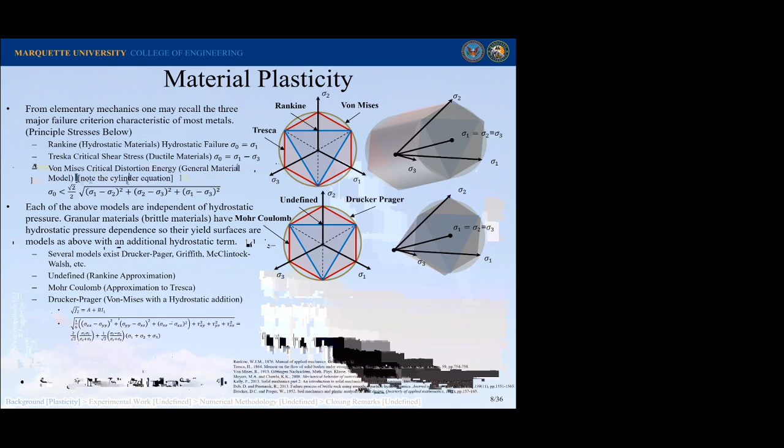So you've got your J2 stress, same as up here, and then you've just got sum of A plus BI1. That's a linear line, the line of this cone right here. Pretty awesome. And if you want to get even fancier, you can put on this plasticity cap right over here. You can see these are all uncapped. This plasticity cap bridges the gap between pressure shear and yield under hydrostatic pressure.

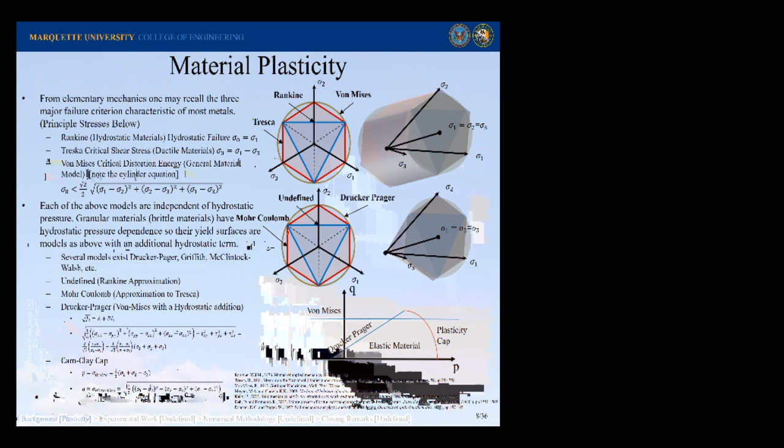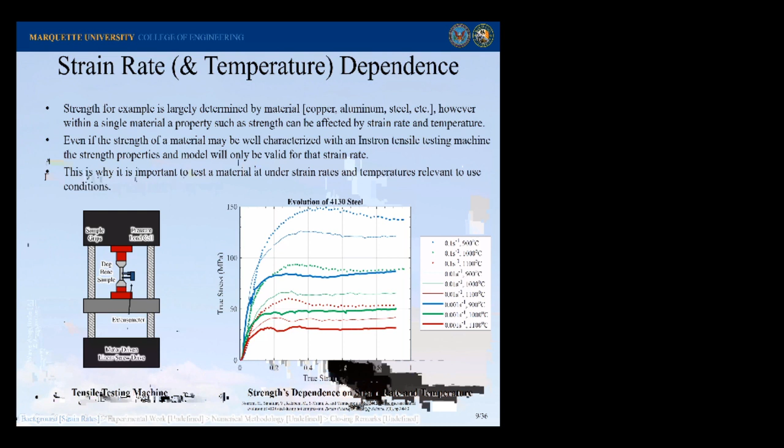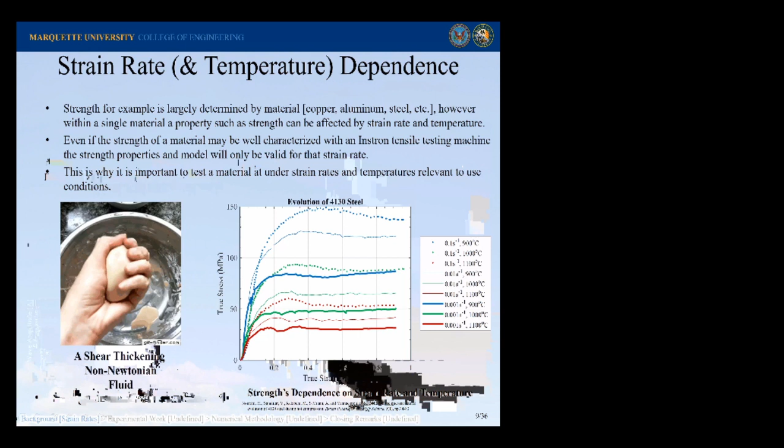So that's temperature's strength dependence. And then the other one to easily think about is non-Newtonian fluids. So this guy is doing the same kind of test in his hands right here. You can see as he increases the strain rate that he's applying to the material, it gets harder and it's not yielding. But if he lowers the strain rate, all of a sudden the material yields. You can think of this as analogous to some of the solids we'll be thinking about today.

How do you measure these strengths? Well, it all comes down to a really simple basic methodology.

So you have something that pulls on a piece of material at different rates, and if you want to get super fancy, instead of doing it at room temperature—which is okay because that's where most of our interactions take place—you add a heating element inside. These are all the things we use to measure strength, from creep, which is super slow, to tensile testing, all the way over to shock loading, and then particle scatter, where we can almost ignore the strength of materials.

But the place where I'm going to focus is right here. Before I go further, I wanted to draw your attention to this graph, just to show you—I really like this plot. It's got the quasi-static strength data, and then you go a little higher in strain rate, and you can see what a big difference that does to your strength.

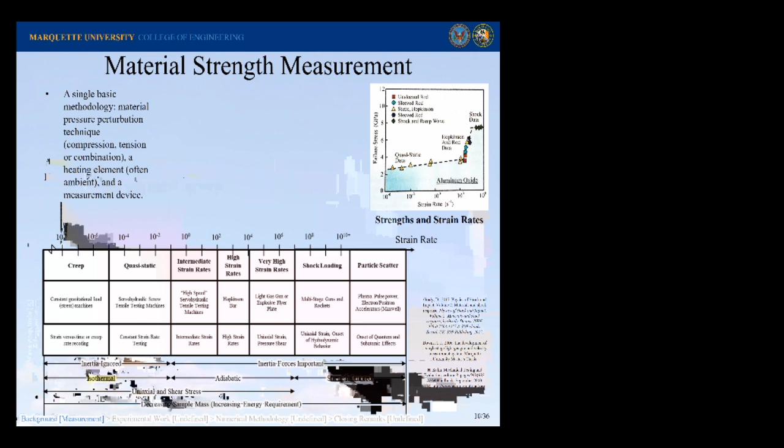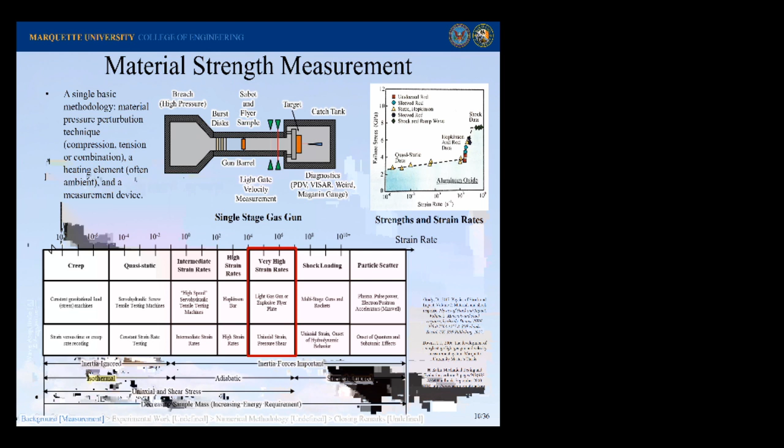So I want to focus on these very high strain rates. I know we have an Instron test machine here, and a lot of other people do, but we're unique in that we have this cool single-stage dual diaphragm gas gun, which has a large bore—helpful for myself later—and a single channel through it, which is also helpful. This will allow us to start probing some of these strength-strain rate relationships. Later on, if we exhaust all we can do with this gas gun, all you need to do is add a heating element, and then we can apply for a new grant. Simple as that.

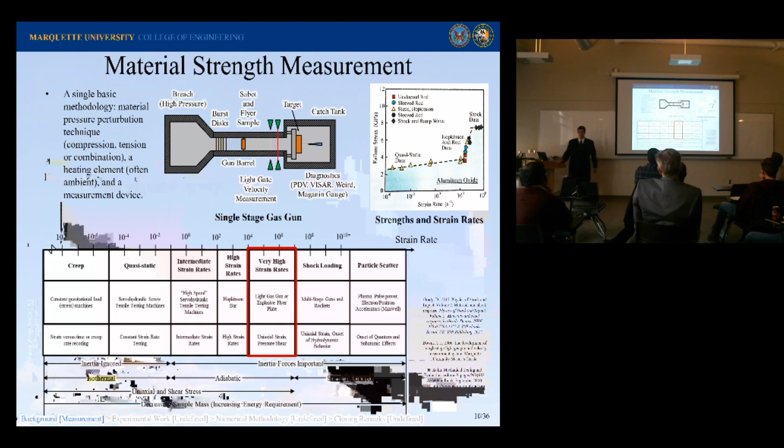Strengthening—let's look at a couple of the models. We went over Drucker-Prager, so I wanted to go back to this elastically perfectly plastic von Mises yield criterion. It's not strain-based, so if we were to plot it, you can see it's just one value. Not very exciting, is it?

But if I use this Drucker-Prager model inside, uniaxial tension and compression—I'm just doing the derivation quickly here—you can see that if you take these terms and set the strength in compression and the strength in tension the same, you end up back with the elastically perfectly plastic model. So each of these things will go backwards. All we did here is add a linear element to this. Then we'll make it a little more complex.

Most of the models today are things like Johnson-Cook, which have higher order terms and include data for different strain rates. You can see the same element right here in the Drucker-Prager, this linear element, right down here. But the only thing different now is instead of that one strain rate Drucker-Prager thing, we've got a couple of scaling terms over here—one scaling term for temperature and one for strain rate, just as I was talking about before. And you can see right here we have a much cooler loading path.

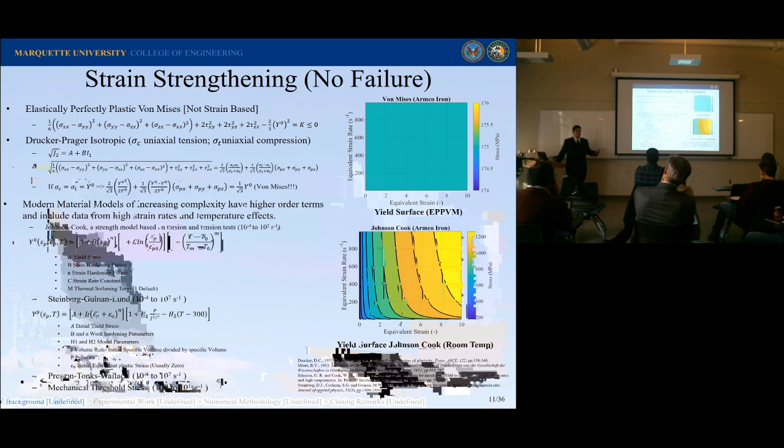And this is yield—it's not ultimate breaking, not snapping, not fracturing, just yielding. So you get plastic stress, plastic flow stress, and it just flows, hugging that yield surface. If you want to get a little more complicated, you just add on extra terms, and start fitting these scaling parameters a little better, and that's all those other strength models are.

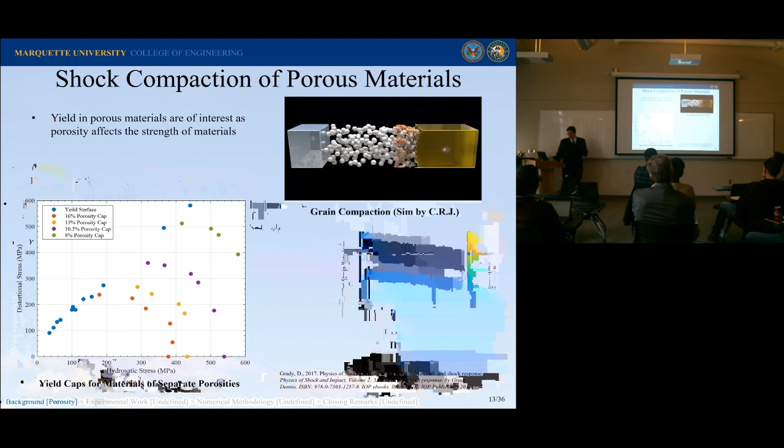Really cool. When you look at different porosity inside materials, you can see that porosity also affects strength. So this is a low porosity, and this is a high porosity; as we decrease in porosity, we increase in strength.

You can think of this as having two different strengths associated with it. Imagine a spring as a porous element, and instead of compaction, we're doing tension. The spring has its elastic regime, right? You pull on it, it might have some plasticity, and you'll be getting the properties of the spring.

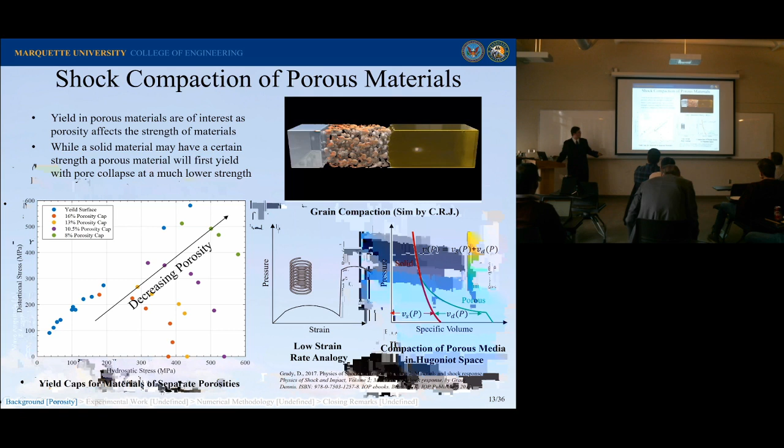But eventually, if you pull on it enough, you'll no longer have a spring, you'll have a solid metal rod. So you'll go from the material properties of a spring, a mesoscale property, to a solid property, which is just the property of the steel you're pulling on. You have to keep that in mind when working with these materials. So you have this porous curve, and eventually it'll fall onto this solid curve.

Quick overview of pressure shear. Why do we want to do it? Typical uniaxial experiments load us in one principal stress area, but pressure shear takes us off that axis and gives us a better yield surface, if you remember the Drucker-Prager. In order to do these, we use the oblique impact experiment. It has a number of uses: dynamic friction, viscosity of materials, but we're going to use it for pressure shear experiments.

So of interest in this study is the distortional strength model of sandstone. You can see this data that already exists, at low strain rate. So we would anticipate a larger curve right here when we go at higher strain rate.

But if we look at porosity, you can definitely see it's having an effect on strength. I've normalized it here, but if I take off the non-dimensionalization, you can see the sandstone has that same curve as before, getting much stronger for lower porosity.

The specific test I want to do is pressure shear: we're going to take a flyer and impact another material. So here's our system: we've got a sabot and a piece of metal on the front, and then we're going to impact the material at an angle.

Based on the wave structure, we're going to first load it in pressure, then in shear, and then get our yield surface. It's really difficult to do it the other way around—if we tried to load it in shear first, because the shear wave is always slower than the longitudinal wave. So you first have to load it longitudinally, then in shear. That's how we get onto our yield surface and populate our curve.

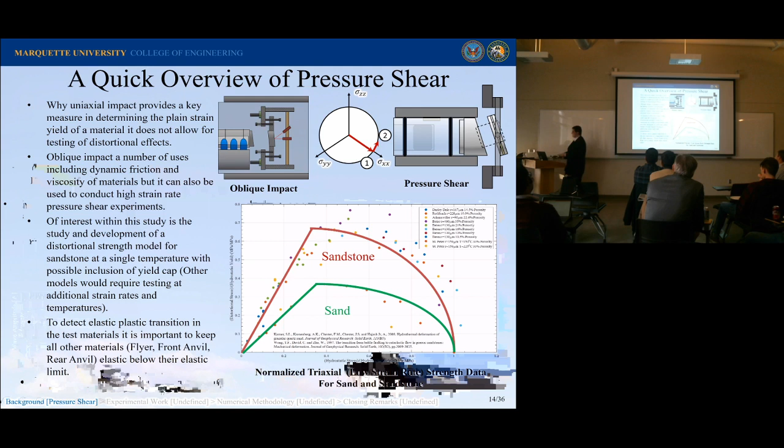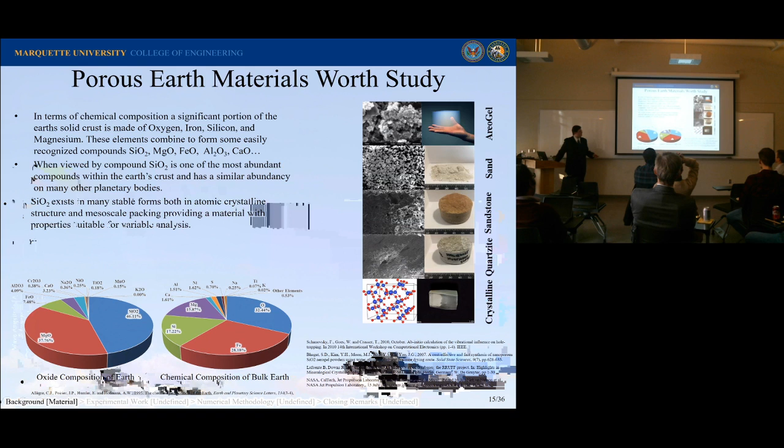The other reason it's worth studying is that it's found in many different stable forms, all the way from this really low density aerogel to this really high density crystalline quartz. If you look at shock behaviors and pressure shear materials, there have been some studies done in the past. I've seen pressure shear results for crystalline materials, as well as recently here at Marquette University for sand at pressure shear and high strain rate.

So I would like to put my stamp right here. If you notice, the casual observer will note that there are two extra slots currently available for enterprising undergraduate and graduate students.

Granular materials and porosities are of great interest, especially to people who work with porous materials, whether those be brake pads or something like that. Propagation of force through these geometries, these force chains, that's pretty interesting behavior, and it's really important for understanding structures and foundations. The scientific community uses this to do simulations and understand the materials around us.

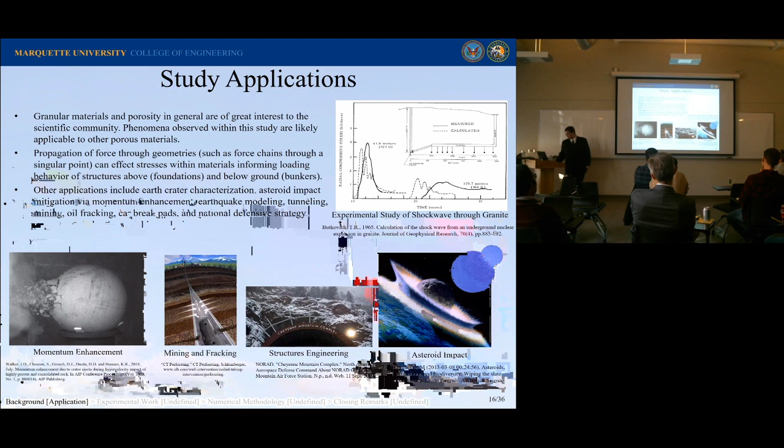Other applications include momentum enhancement. We have mining and fracking, made out of SiO2, that's how you pull out the oils. There's structures engineering, and finally asteroid impact. But as I said, you can also have stuff like brake pads. It's applicable to a wide range of applications.

Next, I'm going to go on to my experimental work. How am I going to do this? I'm going to do three different things: grain property characterization to characterize my grains, a couple of uniaxial shots to figure out the properties of uniaxial sandstone, and then I'm going to try to do strength studies with pressure shear.

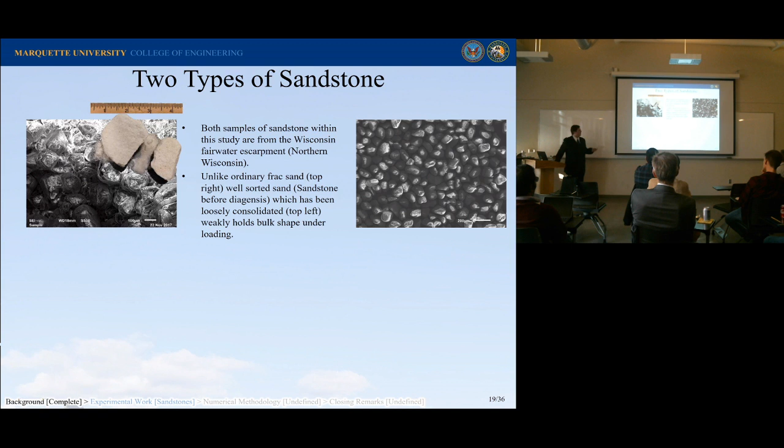I initially looked at two different types of sandstone. I had this loosely consolidated sandstone, which was really hard to work with. It hadn't really undergone diagenesis and it falls straight apart. Then I have this well-consolidated stuff, which is much closer together, so I can machine it, which is awesome.

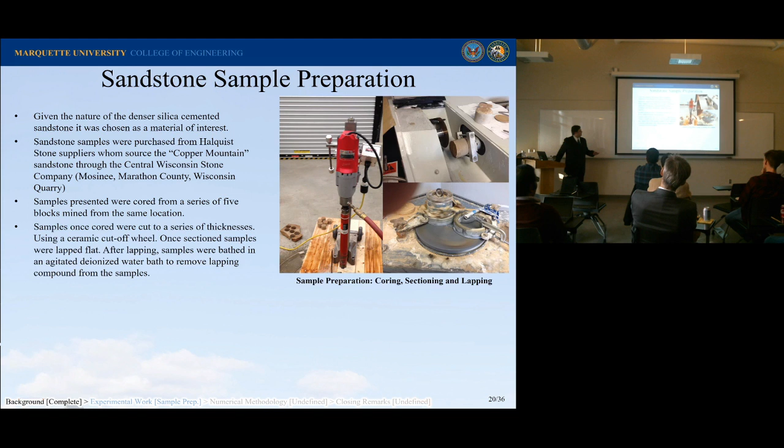To prepare it, I drilled it out, then I lapped and cut it, and then finally I could machine properties into the sandstone. This average grain size allowed me to cut samples as thin as 0.5 millimeters, which was interesting because my largest grain size was 500 micrometers. I think there might be a correlation there.

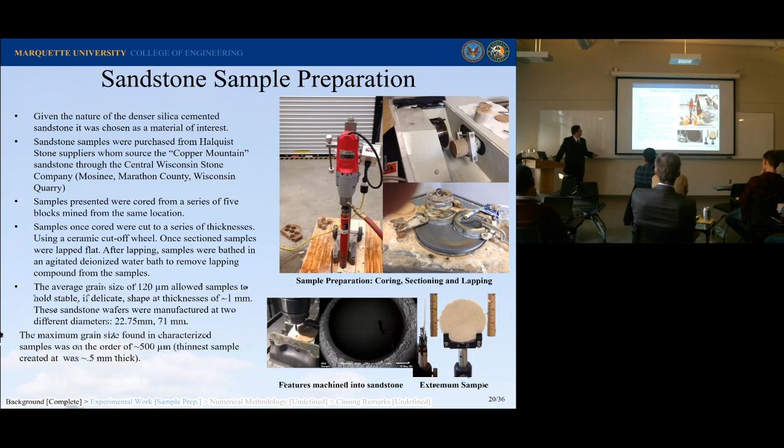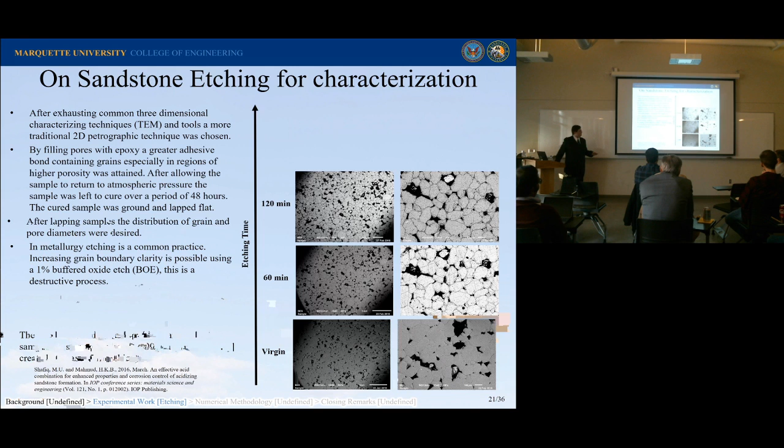In order to characterize the actual grain properties, I looked at some 3-dimensional characterization techniques, but eventually I went to 2-dimensional characterization. I had this virgin material after I cut and lapped it, and then I was able to use a 1% buffered oxide solution etchant, gradually whittling away my boundary areas. Eventually it becomes really porous, so I'd recommend etching somewhere between 60 to 120 minutes to get your characteristic grain sizes.

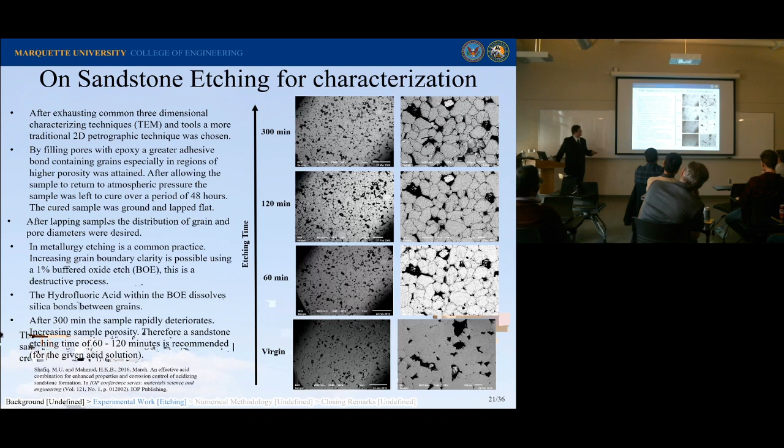Once I have my etched sandstone, I put it through a linear image registration with MATLAB, combined all my pictures together, did some erosion, boundary identification, merged the data together, did an edge discard, and then found my grain size distribution. I could use ImageJ, and then I got some sample statistics out for all of my grains.

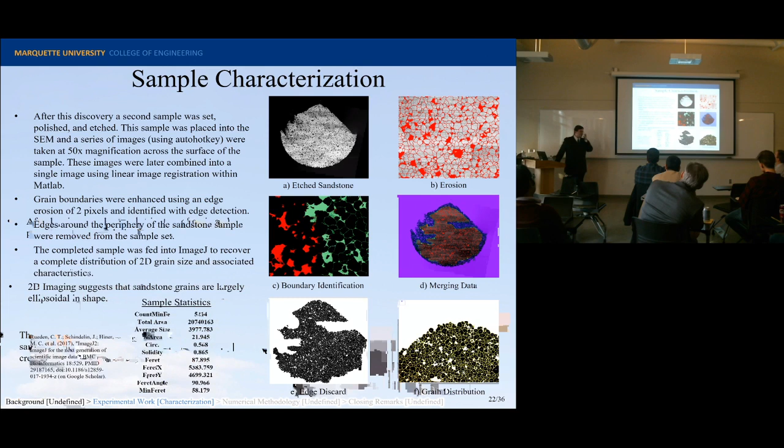I had a total count of 5,154 grains after I did the discard. That was to make sure that I didn't have any boundary grains or ones that were too small. In order to get the 3D grain distribution, I used the Saltykov method, thanks to Dr. Furnell, which takes 2D spheres and makes them into 3D spheres.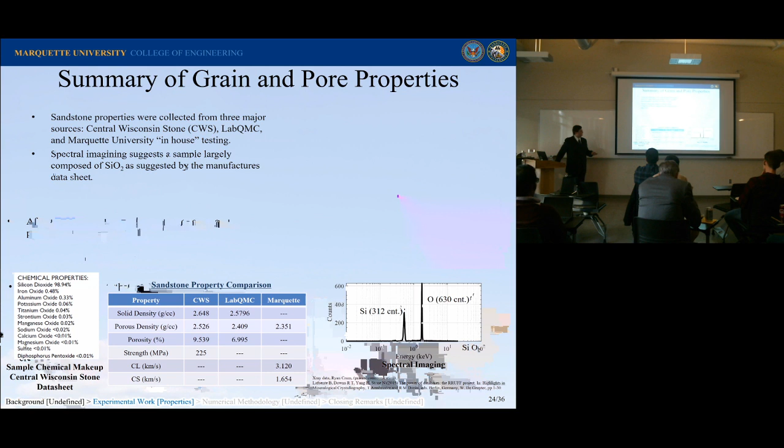For spectral imaging, I was able to put this into our spectral imager. As you can see, it's mostly SiO2, which is a good sign. Then I put it into an X-ray data comparator, and I was able to see that the grains we mostly had were probably alpha quartz. You can see we've got a lot of peaks that match up really well. With these, I can build models later on.

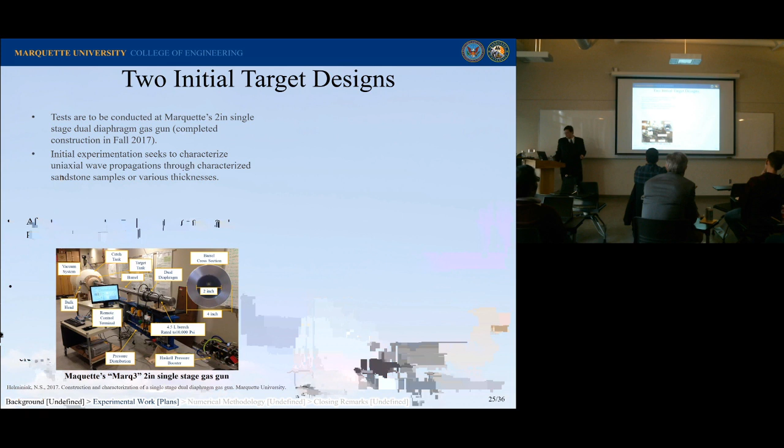So I have two initial target designs, and I'm going to shoot them in our Marq3 single-stage gas gun. We have this single uniaxial sandstone target, where we just hit the face, and then the other target is a 3-sample design, so we can monitor the effect that grain sample thickness has, and figure out the minimum thickness we can use for a heterogeneous sample.

Dan: Can you just go back and slow down on that slide? So you've got this piston, right? Speaker: Yeah, it's pretty much a piston. Dan: Right, okay. And where's the sandstone? There's a thin layer, where is the sandstone? Speaker: So inside the large uniaxial target, it's just sitting at the end of the barrel right here, and then we impact it. Dan: Well, how thin or thick is the sandstone? Speaker: I've gone from 0.5 micrometers all the way up to, I think it's 6 micrometers in thickness.

That's really thin, millimeters. 0.5 millimeters to 6 millimeters, sorry. Oh, like a quarter inch or so.

So basically you're ramming this thing in, right? Yeah, you're hitting it. And then you're measuring. What are you measuring in the sandstone?

I'm measuring the velocities that are coming out the back. So as the waves travel through the material, you get two different things: the pressure that's coming out, a particle velocity, and then you also get a time that it takes for the wave to travel through the medium.

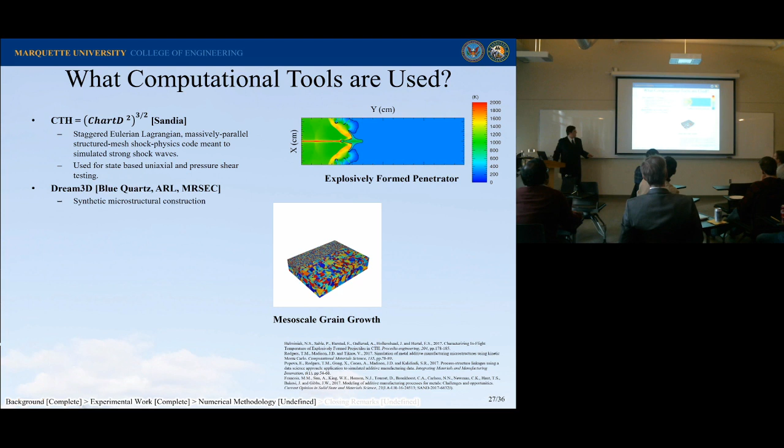Dream 3D is what I use to make my mesostructure; it comes out of the ARL synthetic microstructure reconstruction. ImageJ is what I use to post-process my different grains. And MATLAB is what I use for my data processing.

Finally, to do visualization, I use this program called ParaView out of Sandia National Laboratories. And to do a little bit more of my elastic wave studies, I've played around with Peridigm. I may put it as an addendum inside of my doctoral dissertation, rather than a full part.

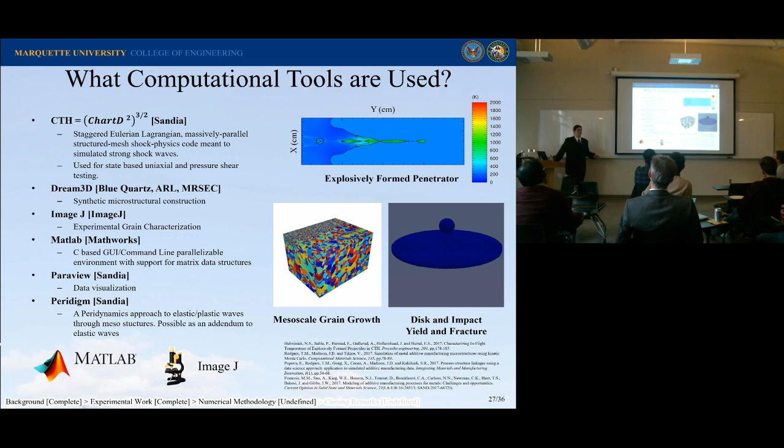I started off with this P-alpha simulation. A P-alpha model just assumes that some sort of heterogeneous material has porosity properties. So it's not great, but it's a good first guess.

I had this 2D rectangular domain. I put in some equations of state; you can see I used the alpha quartz model based on what I have, iron and PMMA, because those are the materials I'm using to hold it. And then I have the strength models.

For the sandstone, I used an EPPVM model that I got off of, I think it was either Gregson or Ahrens and Johnson. I went back from a Hugoniot elastic limit to find the yield strength, and that's valid because they did the test at high strain rate.

So here's the initial conditions: we had an initial velocity of 100 meters a second. You can see this wave come through the first material into this material, go through the sandstone, and then it hits the back wall, and that's where we collect our data.

Based on how the data goes through this sample, that's how we collect it. You can see the material go through, and the impact goes through the sample, and you can see the wave change around here. That's the elastic portion, this is the plastic portion. Then it hits the back surface, and that's what we record off of the back.

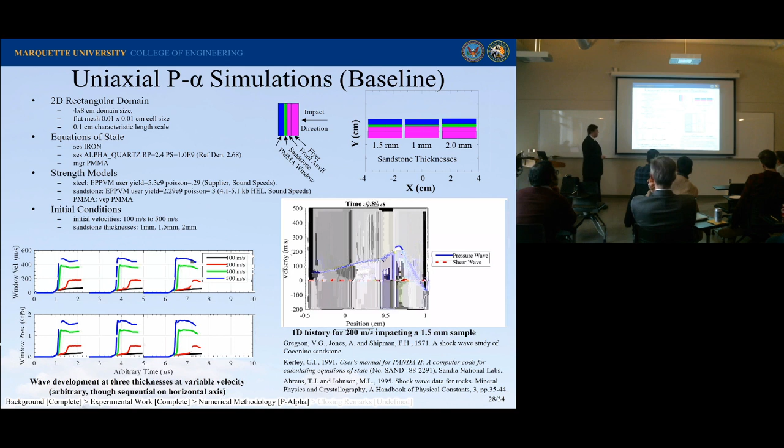Here I've done a number of different simulations. If we look at this one right here at 100 meters a second, you can see it's got one wave and it's really slow velocity. But if we look at this higher velocity one, at 200 meters a second, we can see that we've gone above the elastic regime because we've got two waves, a small one and then a bigger one. And then you can see that slowly starting to taper off in this 400 meters a second one. And by 500 meters a second, we've overdriven our sample. So you can see that from before on our different slides.

Then I started to do some uniaxial thickness simulations that were a little bit better. I built this 3D model in Dream 3D based off of the grain size characteristics from before. I sampled those, put in some equations of state, given some strength models based on quartz this time, since I'm giving the strength model to the grains rather than the whole body as a whole. Then I give it some initial conditions, and you can see right here I have this impactor, and you now get compression of the grains as you go through and decreasing porosity, which is pretty awesome.

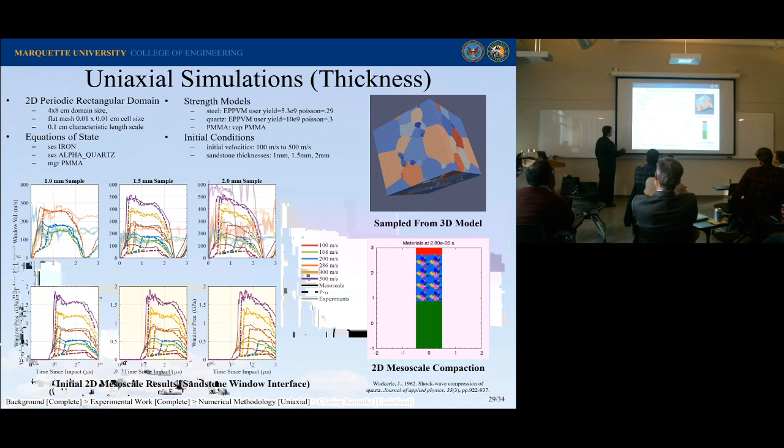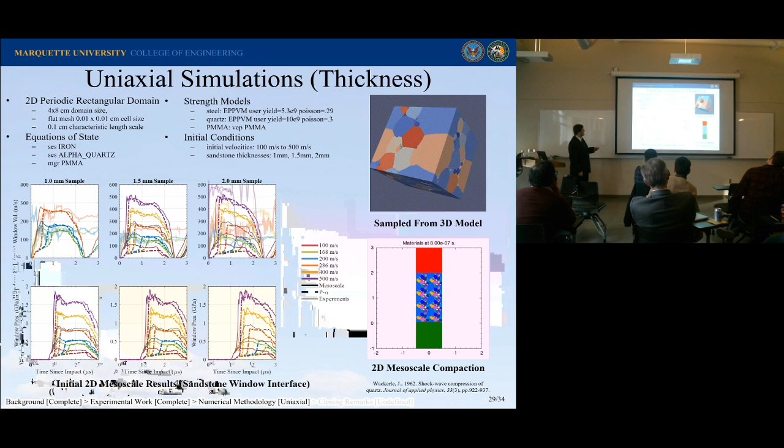Let's go and compare it. This is a pretty busy plot, but I draw your attention to this one over here. This stuff in dotted lines, these are the P alpha models - that's the approximation for a homogeneous, heterogeneous material. You can see right here with my new stuff, this solid line right here - these are my simulations with mesoscale features. And then these light lines right here are some experiments that I've run. I still have some more to go though, but you can see that my mesoscale stuff is fitting a little bit better than my P alpha model, which is pretty cool.

Then I want to do some pressure shear simulations. Once I finish with my uniaxial sims, I want to do pressure shear to get strength. So before I was getting equation of state, now I'm getting strengths. In order to do this, I have a material in the front and a material in the back. First I load it under pressure, and you can see that I've got two different pressures on the front and back surface, but eventually they converge together. After they've converged together, then I put in a shear wave through those materials.

In order to do this, it's really important that you have anvils that are about the same impedance as your other material. That just means that the information traveling in one is close to the information speed rate traveling in the other, and that decreases the number of rings it takes to get a steady state longitudinal pressure. So you want to be up here before you put in the shear, otherwise you won't be at full hydrostatic compression.

So when we go to our Drucker-Prager model that looks like this, we want to go hydrostatic, then distortional. That's how we're doing it right there. You can see on this back surface we have the hydrostatic, we come to a steady state, and then we can measure this shear coming off of the back.

Theoretically we could hit the sample with an identical impedance and then we would get immediate pressure state, but we need something that's a higher strength than the material we want to study. Because if our anvils yield, then we're measuring the yield of the anvils and the material, and it's really hard to parse them apart. So you want anvils that are higher strength than the samples we're trying to measure.

So it gives us a whole bunch of constraints for our experiments. You can see right here I'm trying to do different timings to make sure that my longitudinal waves fully bring up my sample in 3 waves - 1, 2, 3 - which is about 95, 96%, before this shear wave arrives right here. Then this is my timing window where I'm allowed to measure each of these different states. So between here and here I measure the pressure state of 1. Anyway, just a bunch of optimization there.

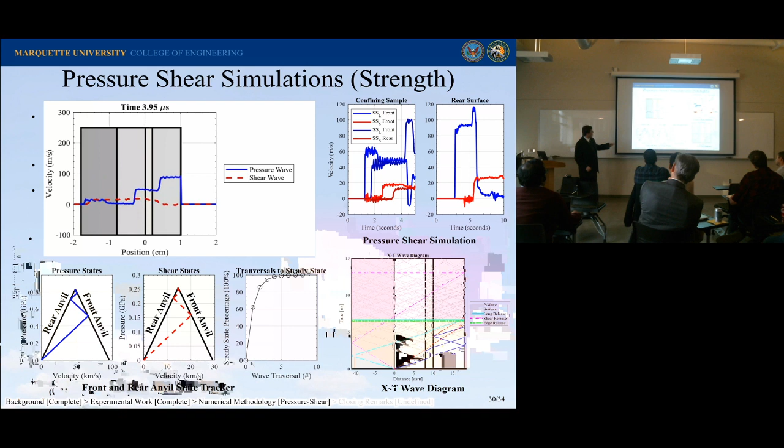So here I have a simulation. You can see the longitudinal wave, this blue wave, coming into the sample, and following right behind it is the shear wave. The shear wave goes through the sample next, and then you get the pressure wave coming off the front, and you get the data. Then the shear wave comes off the back, and you get the shear data.

And so that's how you've measured the strength of material under pressure and shear. You do that at a bunch of velocities, you get a bunch of different hydrostatic pressures, and then you can get different distortional pressures.

Finally, I have some closing remarks, hypotheses, and conclusions. So I hypothesize through this characterization that if I increase the amount of information I put into my numerical models, the more it accurately models the actual stuff I have, the closer I will get to what I really have. I want my numerics to match up with my sims, and the more information I put in, the better that comparison will be. I think that's a pretty good hypothesis.

Uniaxial tests: I want the heterogeneity of the sandstone samples, especially at low thicknesses. This is important because I'm trying to measure the strength of sandstone, not the strength of quartz or the strength of the pores. So I need to make sure I have a maximum thickness of sandstone possible while still being able to do my pressure shear experiments, because if they go too thick, I won't be able to load it up in pressure, then in shear.

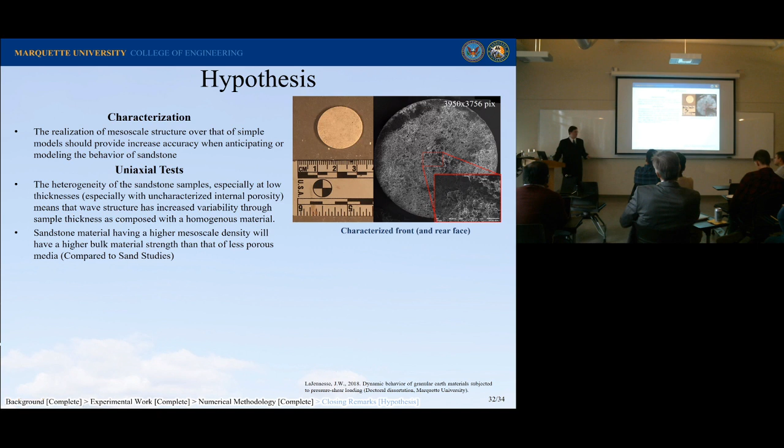And then finally, a sandstone material having higher mesoscale density will have a higher bulk material strength, than a less porous media. We'll see if that's the case as well. If I can do enough pre-characterization, maybe I can see there's a porosity-strength relationship. It'll be a lot easier to do than something like sand, where it's harder to control your porosity. At least I can pre-characterize to some extent.

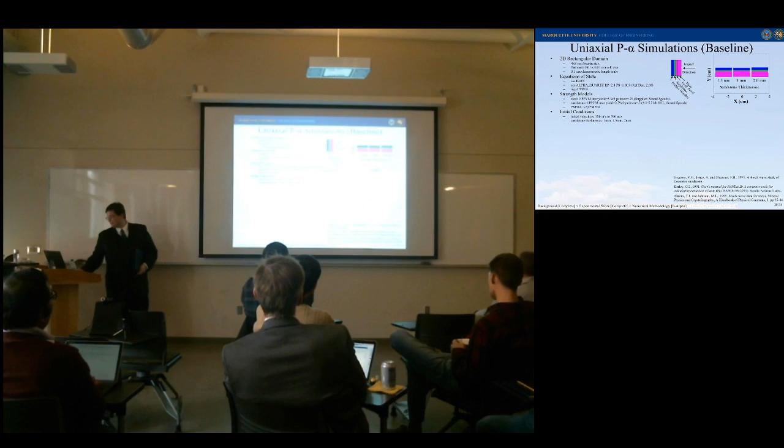You bring up another good point though. Since I'm doing this post-mortem stuff, I could take some of my post-mortem samples, grind them up really fine, throw them inside the X-ray, and see if I get different phases afterwards. That would be pretty cool to see if I got changes in crystalline type. If I went from something like alpha quartz to beta quartz, or maybe even some stishovite, that would be pretty awesome.

David asks a question from Arnie: Nathaniel, how did you pick your PS in your P alpha model? It's set to 1E9. Just curious if you have a sense of what range of values might be appropriate.

Okay, so if I go forward to show what he's talking about. I'm just starting my initial uniaxial and P alpha simulations, and I'm kind of hoping to do a different range of different PS values, just to see what effect it has. I just started off with this one. It's still just in the beginning phases, and I probably need a little bit more fine tuning on my P alpha model. So I will definitely work on doing some more different numerical models to try and fit my data better. This was just a first pass proposal. Fair enough, trick question.

Thanks, Arnie. Dr. Ernest asks: what happens to temperature during shock loading? Typically, the temperature will go up, and then when it releases, the temperature will be a little bit higher than before the wave went over it.

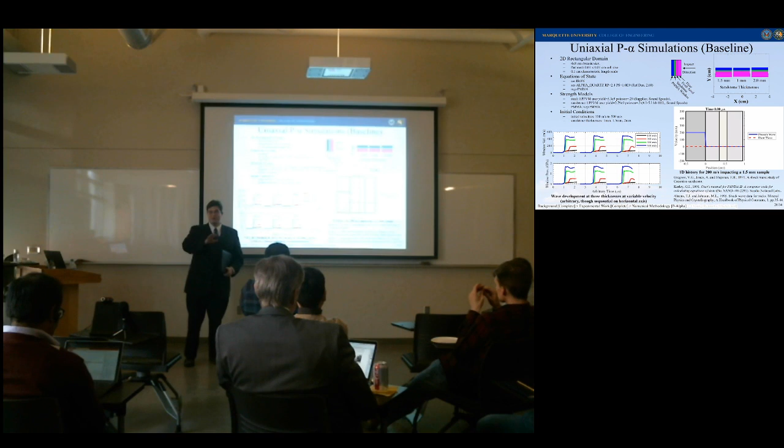So let's say you have something like copper, and you shock it up to 1 megabar. That would go up to, I'm going to guess, something like 700 Kelvin. I'm spitballing here, but this is all orders of magnitude. And then when it falls back down, if you were something at like 300 Kelvin, it'll go up to something like 320 Kelvin. These are all very broad estimate numbers, but there's a really cool equation in Jerry Forbes' book on shock waves that'll take you up in temperature and then back down when it's released adiabatically. But because of that chaos, a little bit of that temperature is left over inside of the material, it doesn't go back down to its original temperature after the shock's passed.

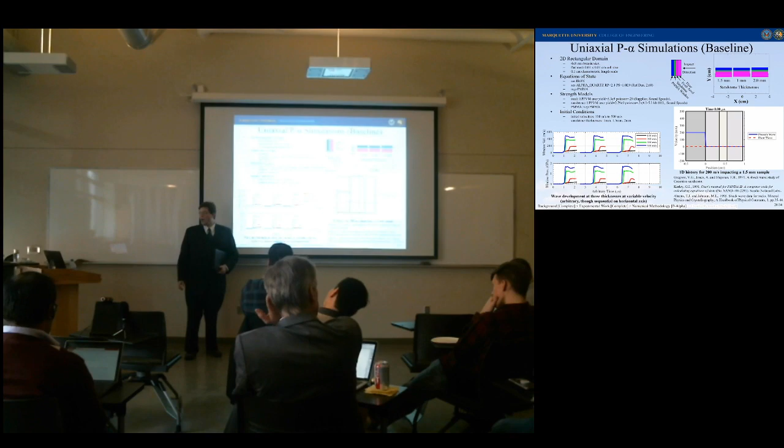But if it happens so fast, you don't expect any transformations due to temperature? I do expect some transformations due to temperature.

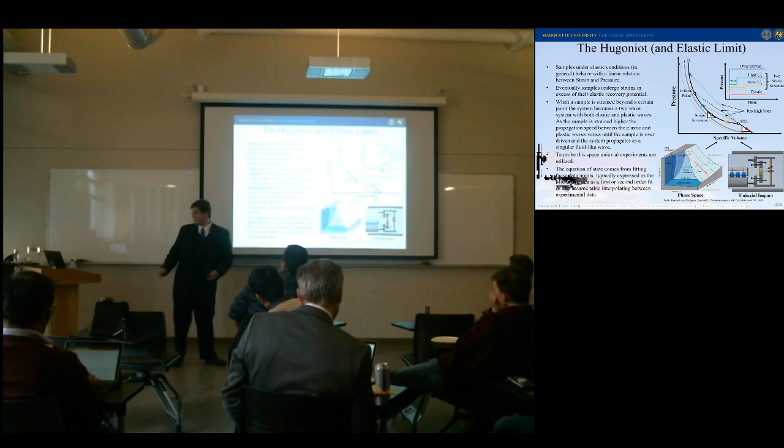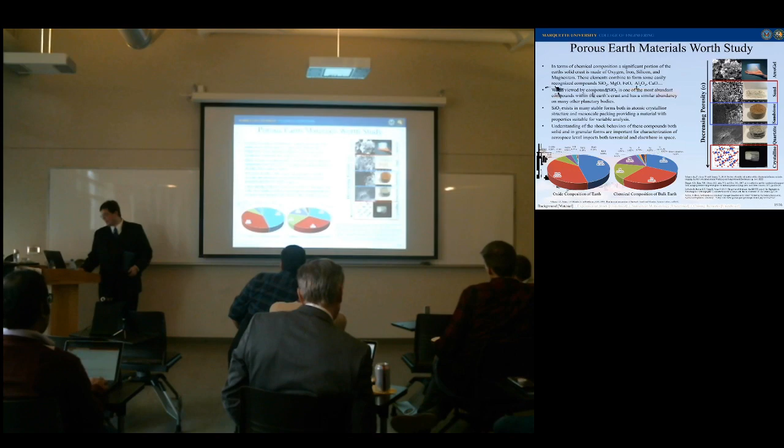So at this point, if I was to start off, I've only got 2, maybe 3 set points. The other thing that's a problem is I've got 3 different types of materials. Maybe at the end of this study, I'll have 3 different materials, I'll have the sandstone, I'll have sand, and I'll have maybe some crystalline data. The problem is when I go from sand to sandstone, my grains aren't necessarily the same. So if I was to make a model for sand to sandstone to crystalline material, I would call it natural, like natural porosity.

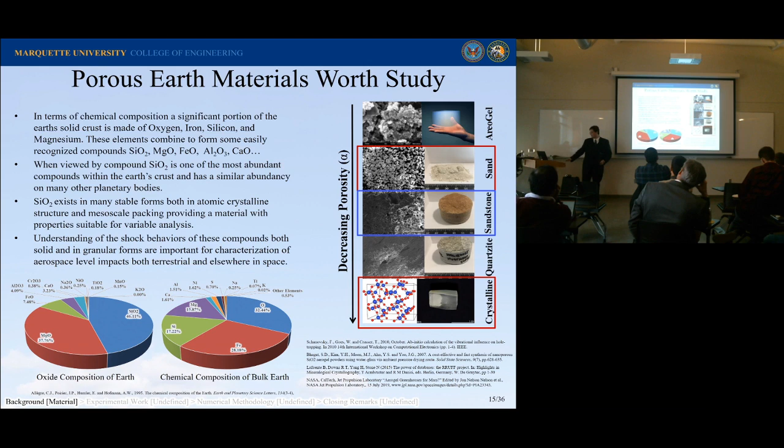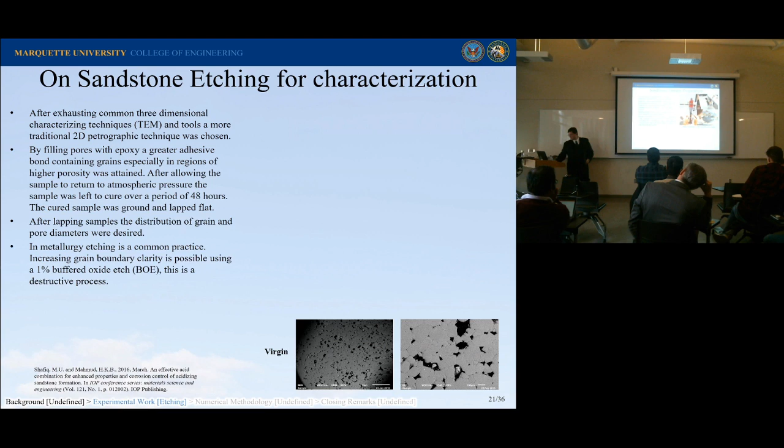Because if you look at the porosity of sand and sandstone in the triaxial test, you would notice that even though I normalized and there were slight differences in porosity, the sandstone still had a higher yield strength than the sand did. I'm not quite sure where it is, I gotta escape, computer's chugging a little bit. But it would have to be something like porosity of naturally occurring silica forms.

Okay, so does your CTH simulation have porosity in it? CTH has porosity in the uniaxial model because I put it there, I put voids and I put solids. And then in the P alpha model, it just gives a slightly different yield value for, okay, we're going to have some compression, and then we're going to allow for a fully dense wave to go through it. And that's why all the waves are so clean and they look so idealized, it's because they are idealizations. Ideally, what I try and do is make an empirical model based off of my results, and then try and feed that into CTH for a different sort of P alpha strength model.

Maybe not include porosity, I don't know. I'll see what data I have and what things I can fit. As long as I've got two data points, I can make a line. Whether or not we should make a line, that's where you get paid the big bucks.

In this model right over here, I've normalized the data, and you have all these different sample porosities, and you can see all the sandstone data falls onto itself. But this sand, which I think may be a similar type of porosity to one of these other ones, when you non-dimensionalize it, it still has different behavior than your sandstone.

Is there anything in the sandstone besides SiO2? A large portion of it was SiO2. If there's anything else in there, I would guess there's a little bit of aluminum oxide left from the lapping process, and there may be trace elements of other materials like feldspar. But the majority of the atomics I was able to pull out of my spectrogram looked like mostly SiO2. I think I zoomed in a little close on it, but there aren't too many other peaks.

So let me just pull this back up again. Looking at my elements, you can see little trace peaks of other things down inside here, but the vast majority of the material is SiO2. This is zoomed out - I took a broad picture of a number of grains. But I would guiltily say that there may be some trace flecks of aluminum oxide, which I try and take that out through cleaning.

You've got that pulsar, a hydrosonic pulsar for cleaning jewelry and other types of materials, and I try and soak my samples afterwards to try and leach out as much of the aluminum oxide as possible before I shoot.

Those porosity levels that you have, why is it so different - is it sample-to-sample variation, or the testing method? One of these, the one that came from Central Wisconsin Stone, was a spec sheet. The ones from Lab QMC were taken from our specific cut of material. I try and get initial density values by doing some dry weighing and size characterization. So if I know the weight of fused quartz, and the volume of my puck, I can pull out a rough porosity.

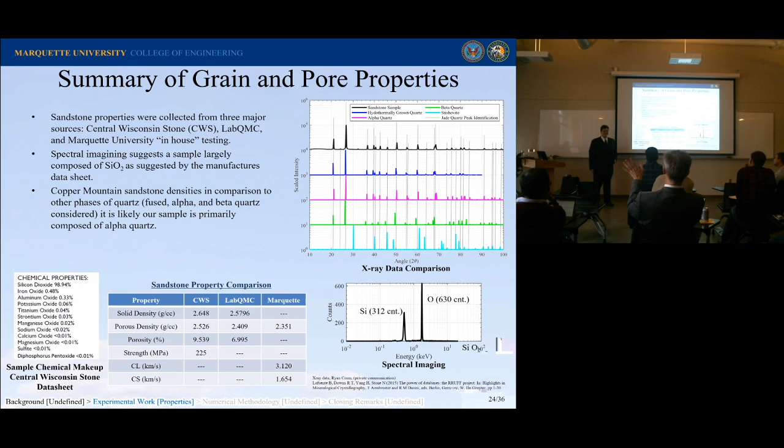With regard to the experiments, what are you proposing to do exactly? I'm proposing to do two different things. I want to characterize the samples. For uniaxial, I want to do a number of extra tests for different sample thicknesses to characterize wave propagation, as well as characterize final states that the sandstone gets to. That'll give me one of my constitutive relations. Which one? What are you going after here?

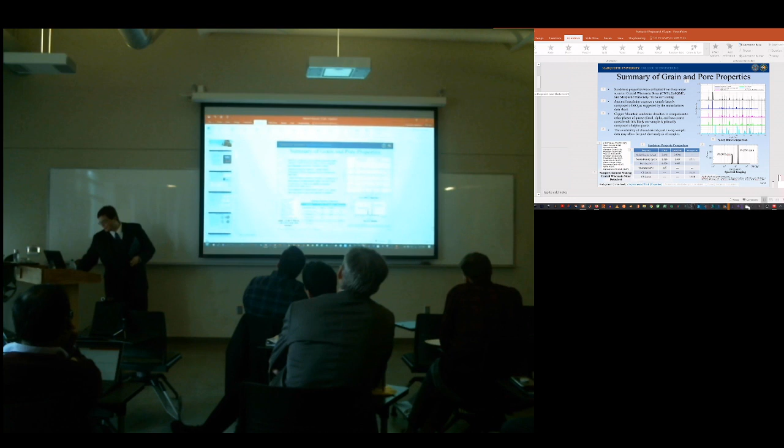So let's say that I have these 5 equations: mass, momentum, and energy. I already know mass, momentum, and energy, but I would like to know these 2 closure relations for my sandstone. I want to know my US-UP relationship. I don't know that I'll be able to pull out an equation of state, so I'll have to use that from somebody else. I would like to pull out this Hugoniot relationship for my sandstone, and I would like to pull out a strength model for my sandstone.

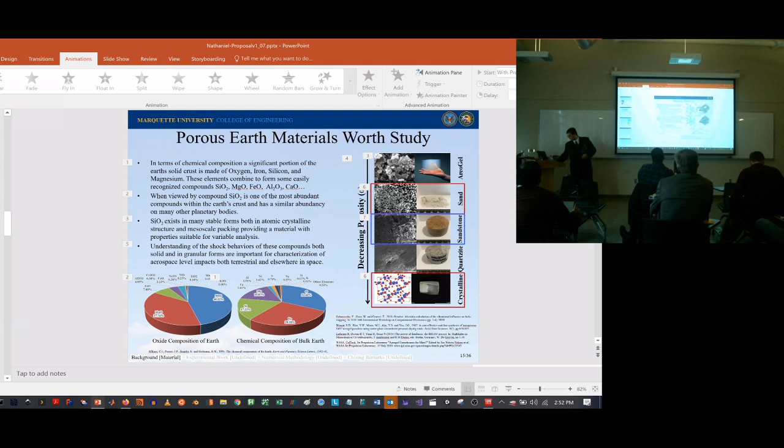And so the reason why my study is important, the reason that Jeff's study was important, is we're doing it at a different strain rate. If you recall one of the diagrams that I had in the upper right-hand corner, you could see that strain rate had a large effect on strength. So the way you figure that out is to measure it empirically.

hydrostatic distortional stress regime. So how many experiments are you proposing to do? I'm proposing to do about 10 uniaxial and 10 pressure shear. If I've got time, maybe more. How much time are you going to need to do 10 and 10? Probably a year.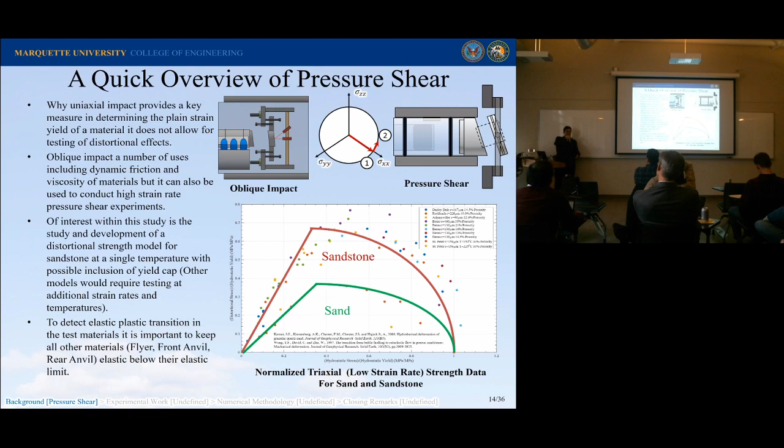I've got a number of uniaxial experiments ready to go over this break, if the proposal is accepted. Otherwise, I might have to go back to the drawing board. And then you can see that I've got some of my pressure shear materials, and then designed for an anvil all put together. So we'll see. I'll have to go to the machine shop and see what I can do.

How are you proposing to make your measurements? Using velocity probes. I'm measuring off the back surface the different types of waves that come through the material. I measure the amount of time that it takes the wave to travel from the front anvil to the rear anvil. That'll give me US. And then if I measure off of the rear surface, then I'll get my UP value. For pressure shear, I'll need at least 2 probes, one to measure in the normal direction and then one to measure in the shear direction.

Do you have, because in the proposal that you sent out, it wasn't necessarily like a test matrix of what you're listed. Oh, okay. Do you have such a beast? Not on me, but I do have it. It's on the upper right-hand corner of my cubicle. Yeah, it'd be nice just to say, you know.

Yeah. So in the numerical matrix, the first thing that I'm testing while I don't have my experimental data is I'm just testing mainly what yield strength has as an effect on the sandstone grains. There isn't really great data out there for what the yield strength is for quartz crystals. So I'm just doing a number of different yield strengths for the sandstone quartz crystals in order to see what matches best with my uniaxial sims. And then once I have my uniaxial sims, I'll be able to pipe that into my pressure shear and see if it works.

So I have two anvils, about 0.8 centimeters thick. And you can see my XT diagram right over here. I get just enough reverberations to get to my steady state, in my opinion, or as close as I'm going to be able to get through my sample. What is that material? This is sandstone, and these two materials here are aluminum 7075 T6.

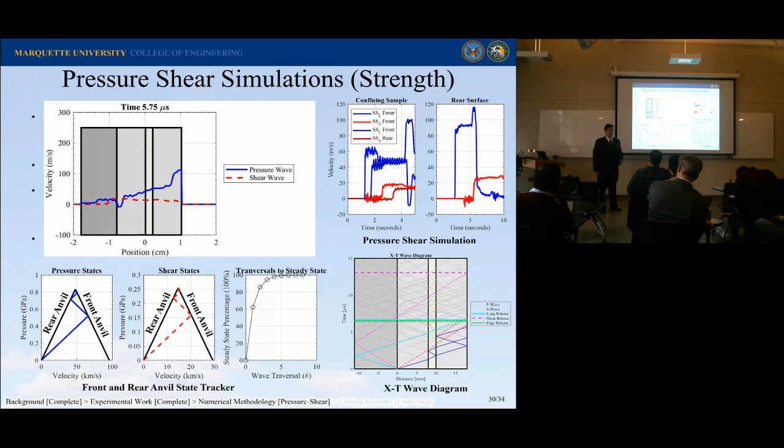Why do you need that stuff? It'd be closer impedance and higher strength. Tungsten carbide, higher strength, means I can do more in my shear stress distribution. What size sapphire, sapphire discs? Probably 2 inches in diameter, but they also have to be machinable. Why? I need to be able to put pins and probes around the surfaces of things and measure through the samples, because I'm coming right up against the limit of what I can do for my sandstone diameter.

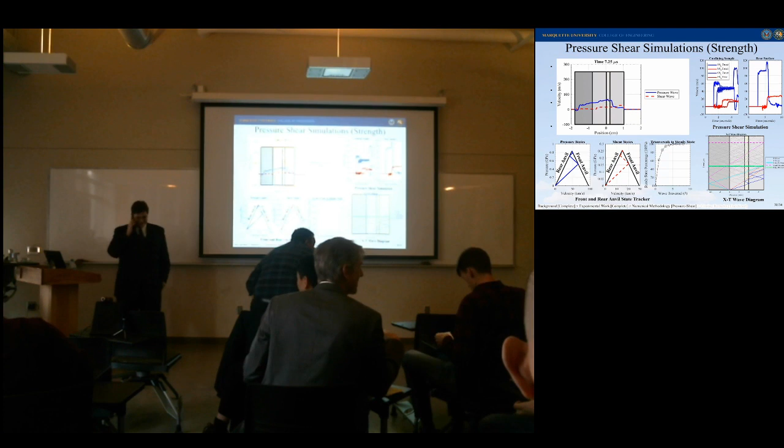Hey, Ernie. Did you have any other questions?